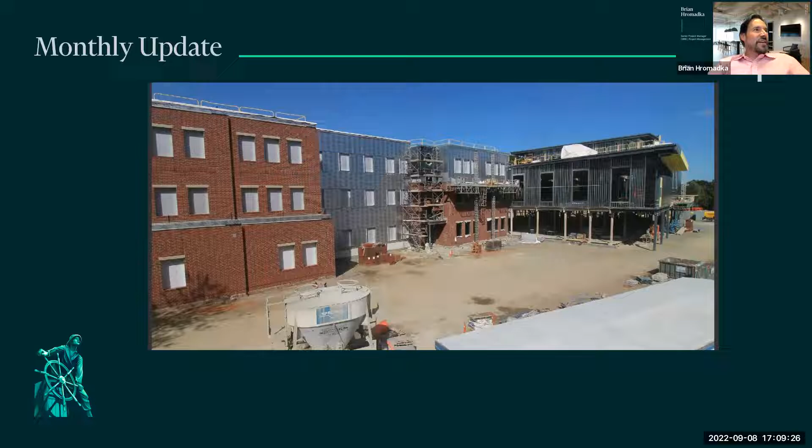We're actually getting this air and vapor barrier all the way around the building now, starting to look almost like a little bit of a spaceship with all that silver. But the project continues to track well, on schedule and on budget. We've been finishing up the building exterior as well as the interior framing and the rough-ins on the mechanical, electrical, and plumbing work. This is really a great time to see the building up close because you can gain appreciation for the amount of work that goes into the finished product. There's a high level of coordination both on the inside work and the outside work, and you can see that whole spectrum of it right now.

Building B is also making good progress, and over the next few months it's going to be catching up with Building A. We've had some material delays on a few different items, but WT Rich has been able to coordinate the work activities to accommodate some of those delays, so we're very appreciative of some of those things.

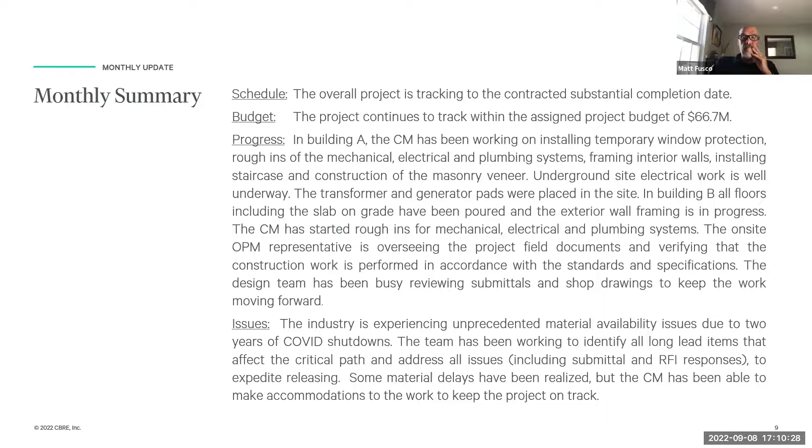As far as the team activity goes, things continue to be good. Everyone's working well together, and that's really been key to the success of this project so far. Everyone's trying to do their best and collaborate in order to provide good results.

WT Rich hosted a little luncheon for the on-site workers last week. That was also a nice thing to get together and celebrate the progress we've made so far and build relationships. So we appreciate that.

As far as our roles go, they're pretty much the same as last month. The building's coming together, we're about ready to start finishes. Like I say, we are tracking on time and on budget.

So if we switch to some of the financials here, we have now included the change orders that were approved last month. This bumped up the construction costs of the job, but the funds were able to be covered by the resources that we've set aside for the construction contingencies. And we continue to maintain a healthy amount of these contingencies for where we are to date in the progress of the work, despite a lot of the challenges that we faced with market conditions.

I think this is really on behalf of the team working well together during the planning, design, and construction phases, really all of those things combined. But we've also been fortunate that we haven't been hit by any major disruptions so far. So knock on wood, hopefully we'll be continuing that way.

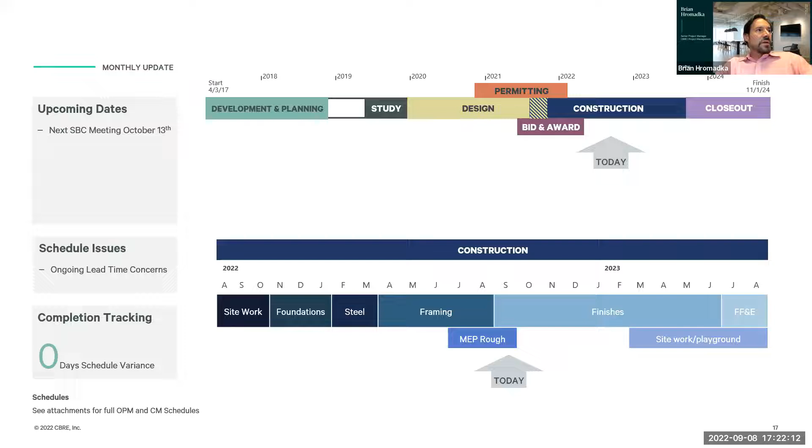Moving on to the OPM, as far as the specifics of what each of us have been doing, the OPM continues to operate much the same as before. We've been working through a lot of the project financials to determine opportunities for further enhancing the school, possibly adding back some various items, while also managing current costs.

Keeping all the accounting sheets balanced, community relations continue to remain strong as well. We haven't had any issues. We continue to send out notices — one just went out today for a delivery happening tomorrow. But now that the building's getting closed up, disruptions to the neighborhood will continue to diminish.

As far as the design team goes, their work on the project continues to move along with the FF&E — that's the furnishings, fixtures and equipment selection process. We've updated our project schedule to show that, and it's all included in your packets, with the milestones. Sample furniture is going to be showing up soon at both the vet school and East Gloucester schools.

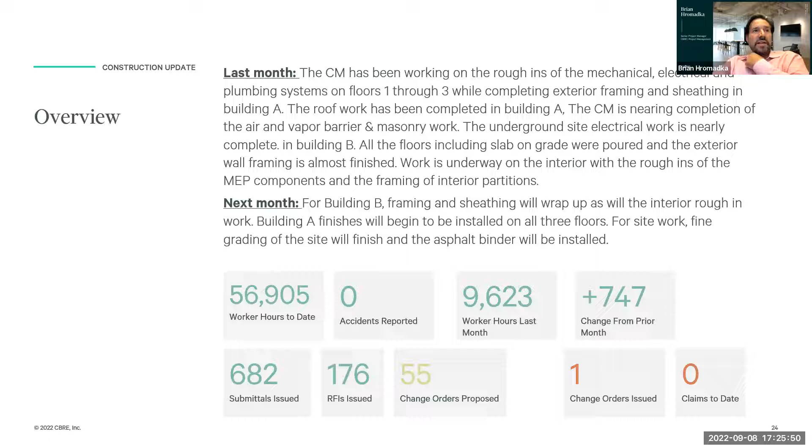As I said before, we're continuing to track on schedule. If we look at these milestones, some of them we finish ahead of time, some of them we finish maybe a little behind, but overall the work continues to track to the schedule. These variations are typical — sometimes you run into things that happen on the job, but WT Rich has done a good job of accommodating whatever delays have happened and keeping the overall project on schedule.

Here's the schedule updates with a little more specifics about where we stand on each of those items. And I can turn it over to WT Rich to walk you through.

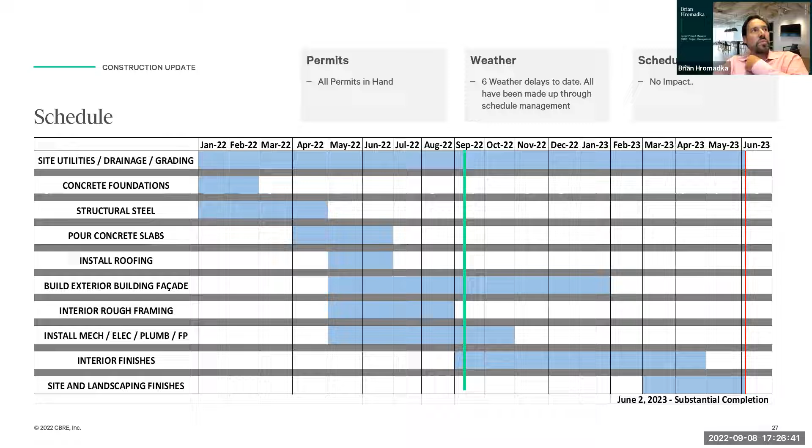This month we'll be doing the open space as we've done before, so it'll be a nice opportunity, as I mentioned, to see some of the things going on inside the building and the level of complexity you'll see on all the systems.

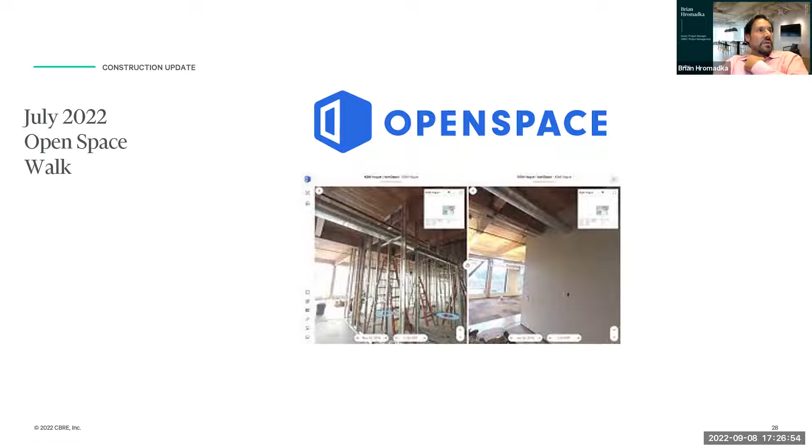So I'll stop sharing here. And Alex, can you pick up? Sure, I need access. Currently disabled at the moment.

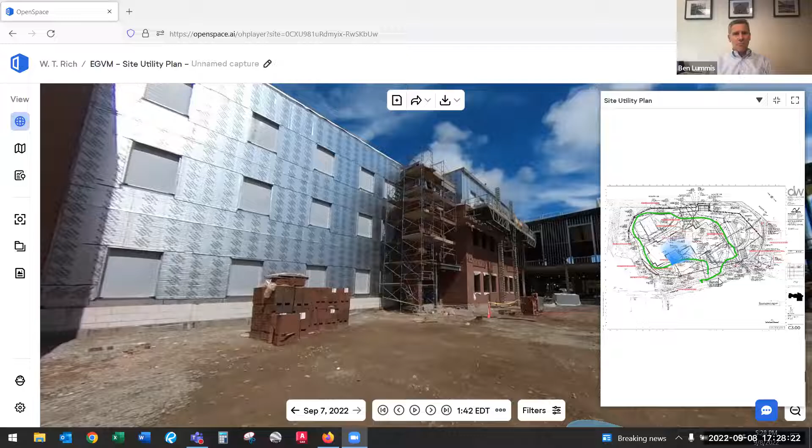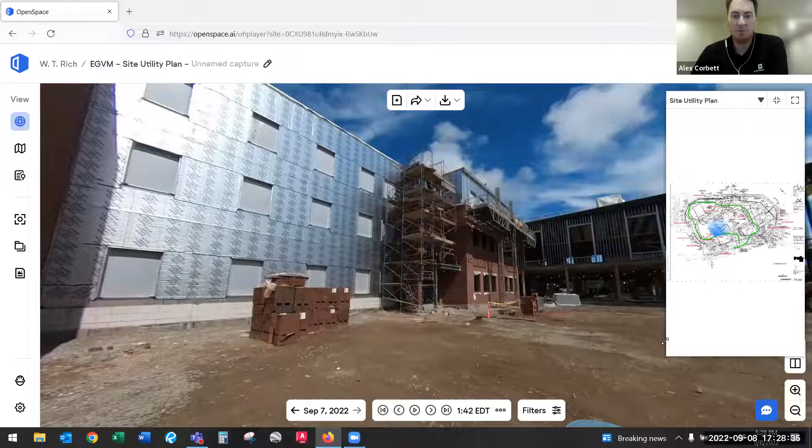Thanks, Ben. So this is the open space program Brian mentioned, which you've seen a few times throughout the project. I'm sure everyone has probably seen it from the street now, so I wanted to start there. As Brian mentioned, the AVB, the air vapor barrier, is going up on A building now - that's the silver aluminum foil material being wrapped on the building.

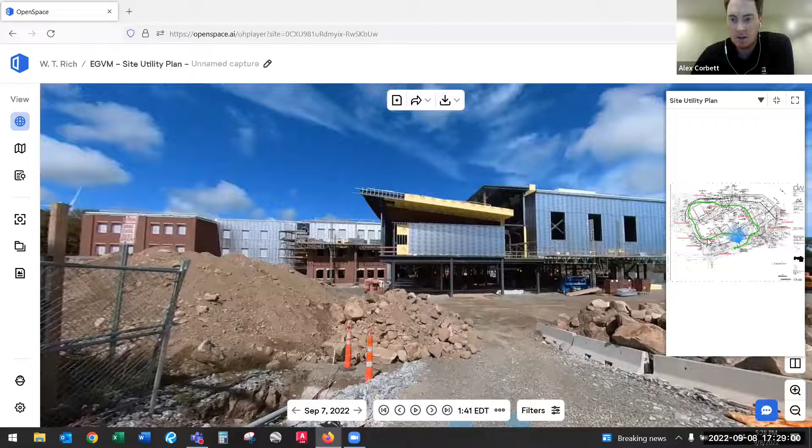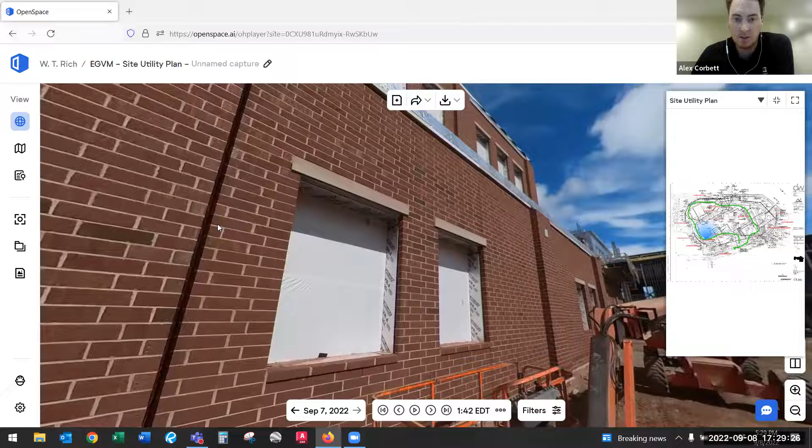We've also started cleaning the brick, which is a pretty normal process once we get the brick installed. I wanted to show you the juxtaposition of dirty brick that hasn't been cleaned yet versus, as you move closer, how nice it looks once cleaned and scraped. You can also see the temporary windows placed within these openings - fire rated tarps that allow us to begin finishes within the building.

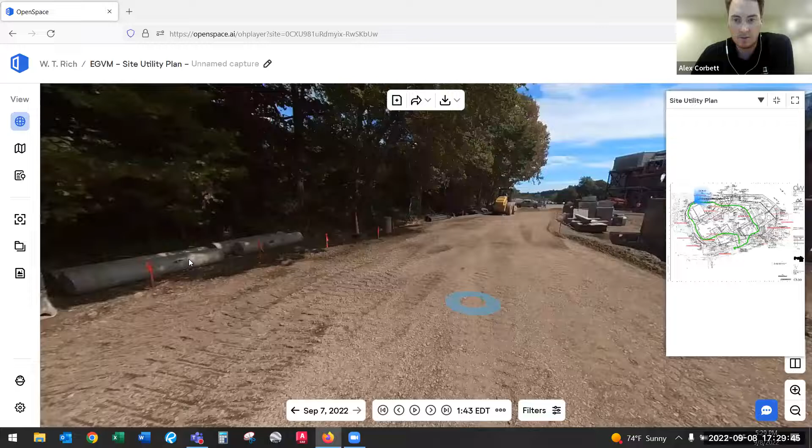I'll rotate quickly around the site and then get into the building. We're standing at the back turf area - you'll see the turf, with the playground on either side, and then the running track and bus loop mix comes into play. We're getting ready to place binder next week, which is a nice next step. It'll tidy up the site quite a bit, and you can see how clean some of these roadways are getting now that we're fine grading and getting ready for binder.

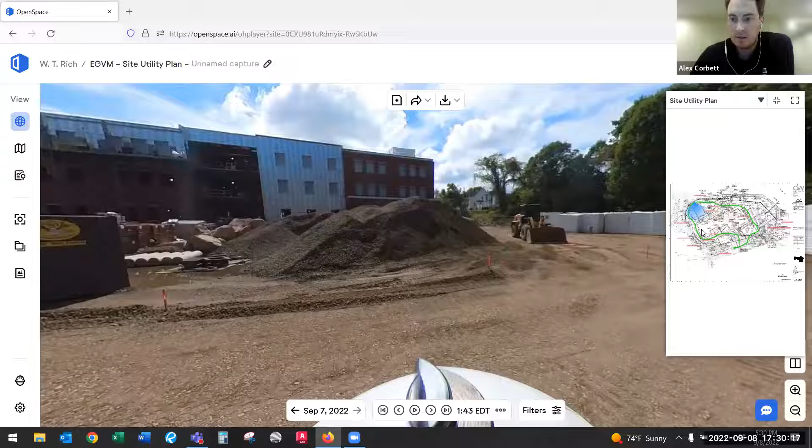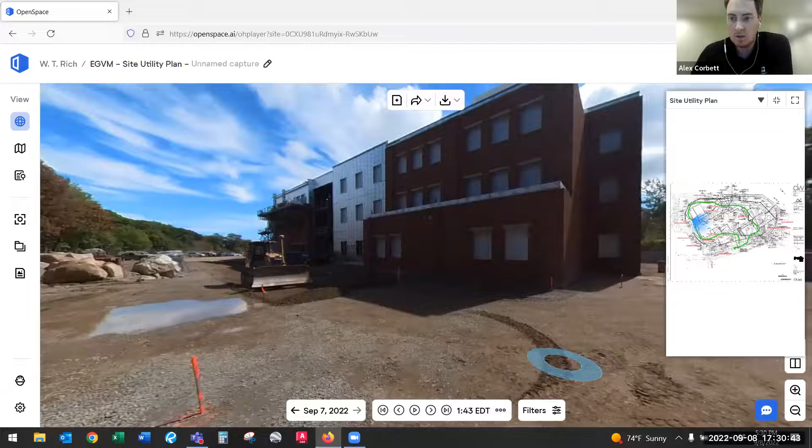Again, a back view for those who haven't seen this side. You can see the brick going up - it's been cleaned on this side, and bricks going up on this side. We've got the AVB, and this is a metal wall panel infill here, with a large curtain wall, a 3-story curtain wall. We just got the material today and will start installing it. I'll work to the east side before we get into the building, to see how the gym is taking shape with some of those large openings.

Last question - when you mentioned binder, can you explain what you mean? Binder is basically the base coat of the asphalt pavement, so two layers of asphalt. We'll do the binder course at 1.5 inches, and then come in over the top, with the last thing being the last 1.5 inches of top coat asphalt. The binder really helps keep the site clean, but it's also a necessary step to get the final asphalt in place at a later date.

Is the binder that first coat? It's like considering it a primer coat or a first coat of the asphalt. Great, thank you very much.

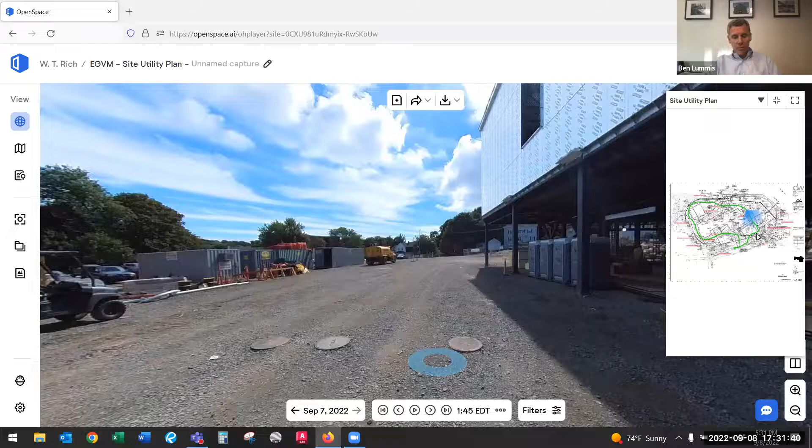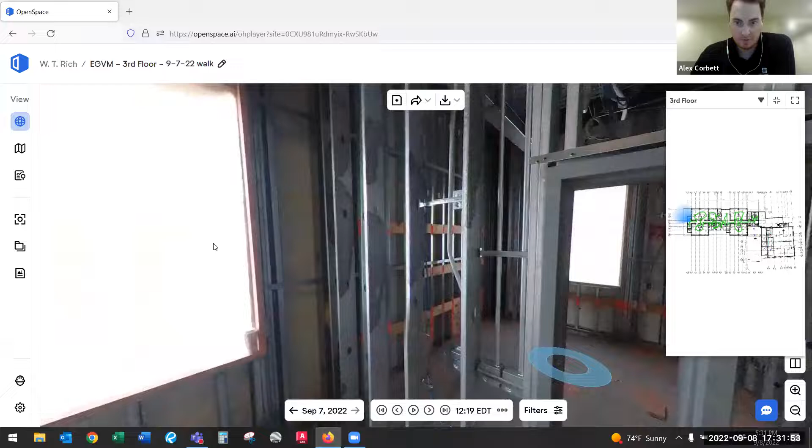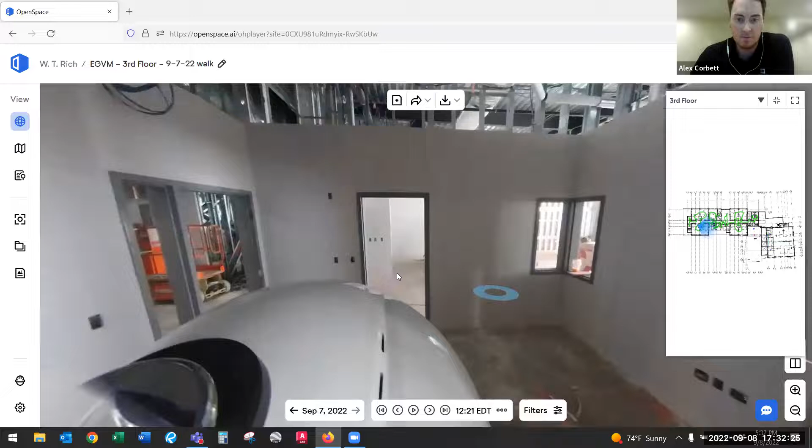So let me move inside. I'll go to the 3rd floor since that's the furthest along per our schedule, and I've brought you down these corridors before. It's obviously getting more enclosed as the project goes along. You can see the framing is 100% complete at this point. A lot of the orange spray paint you'll see is not only for in-wall blocking, but also for labeling devices on the ground. One of our milestones was starting drywall this week and into next, so we're right on track to start boarding up some of these walls. The building inspectors have been through.

We all kind of get on the same page in terms of what they want to see before we close up these walls.

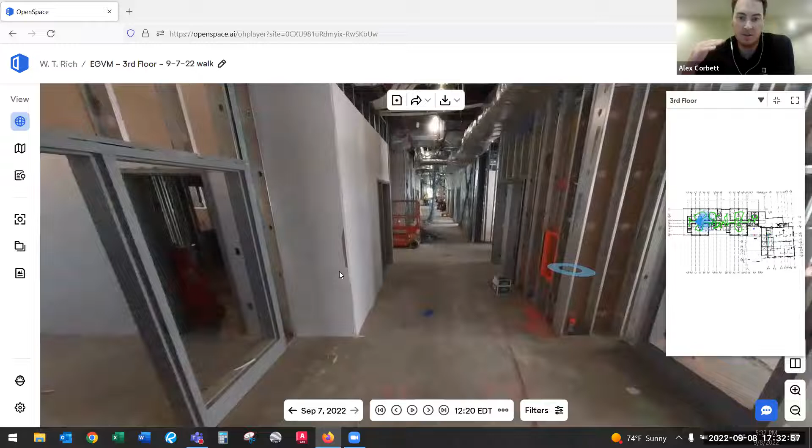We've actually had a lot of our rough MEP inspections, which is basically confirming that wires are in place, ducts installed correctly, piping's been terminated properly and whatnot. So a lot of that's already been conducted on the 3rd floor. We've tested our fire protection lines as well.

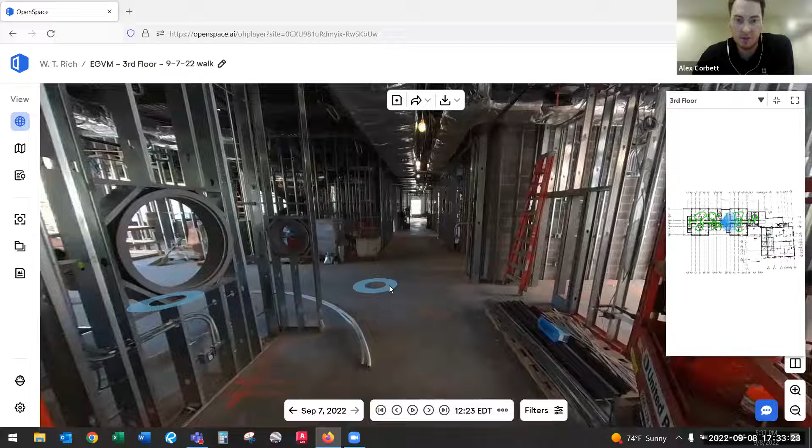We'll continue to move down 2nd floor to 1st floor as the project progresses. Hopefully by the 19th, when you guys are on site, it'll give you a nice insight into what some of these rooms look like—somewhat finished with the drywall on, but also some unfinished with the framing on the lower levels. So again, just walking you through here, you can see the porthole windows that Doran Whittier incorporated into the design.

This is a large extended learning space with that curtain wall that I mentioned earlier. A really nice big space for extended learning. We've got stairwells.

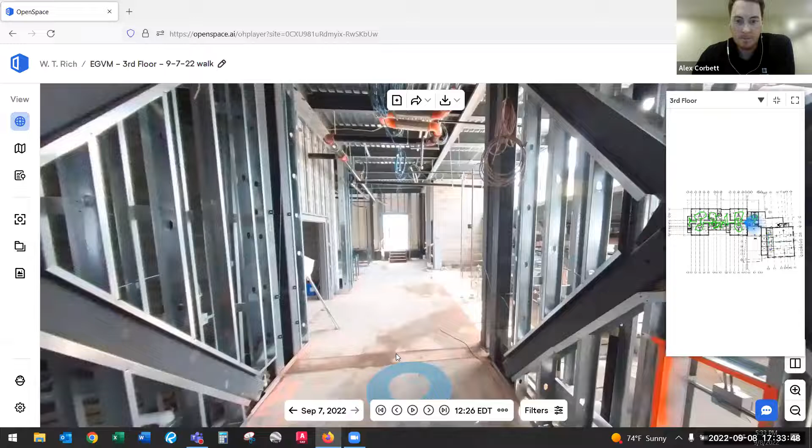I'll work my way down towards B building. End of corridor. And this is where the elevator will be. I won't bring you to 2nd and 1st because I think you guys have seen it for the most part, but again, you can see the development of how this 3rd floor is going, and how it's going to progress over the next few weeks into really getting the finishes going.

So I'll move to B building just to show you where we're at with some of these larger open spaces.

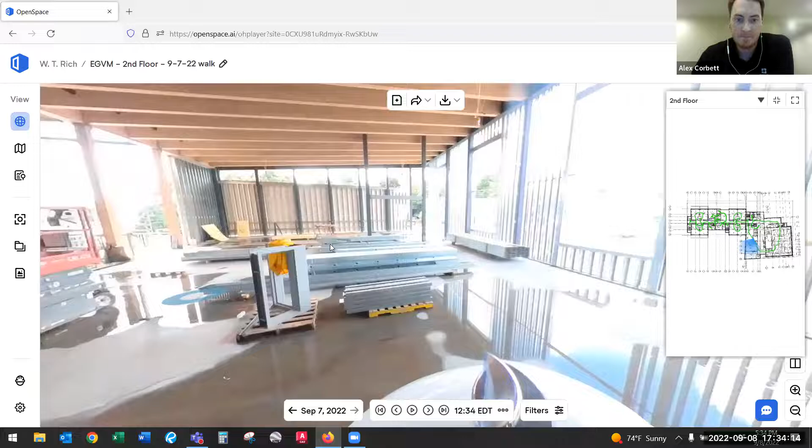This was after a pretty decent rainstorm over the weekend and into Monday, so we don't have a roof over the media center yet. This is the media center area, but we're pushing for that roof because it allows us to continue with some of the more moisture-sensitive activities below. Again, gigantic windows into the media center. You can see the glulam that I think I showed you guys a month or so ago as well.

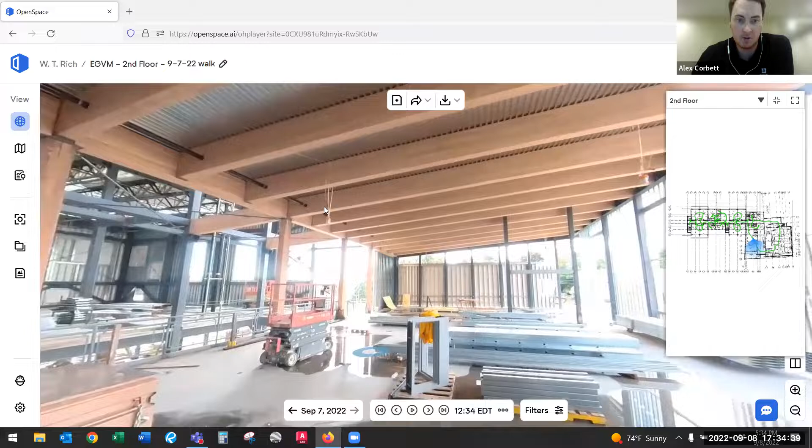Crossing over that 2nd, mezzanine level of the main lobby, you can see just how gigantic the space is with the glulams and the steel. That'll be painted and exposed in various capacities.

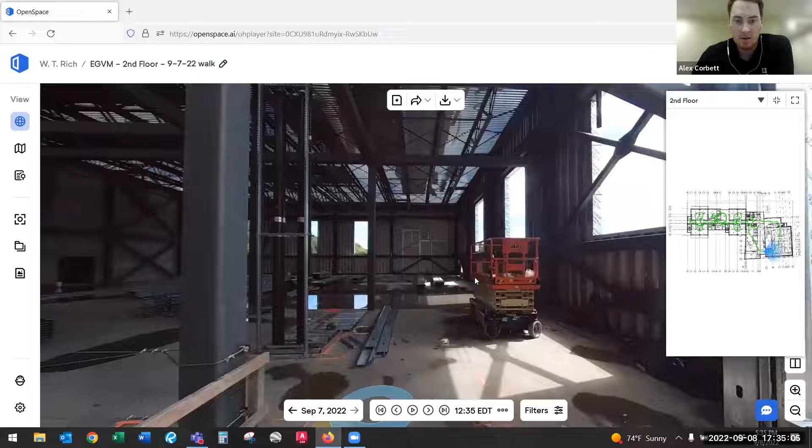And then you get into the gym with the large windows as well. It's kind of our lay down area right now for the larger studs. Over the course of the next few weeks, we'll start getting these studs up in place, following a similar sequence to A building—getting the studs up, and then getting the rough MEP stuff to follow into finishes. So we're looking at the stage right now, or the platform, that'll be constructed and framed out over the next few weeks.

That's kind of the general building tour. Obviously, you guys will see a lot more in the next week or so when you're on site, but I'd be happy to answer any questions if there were any.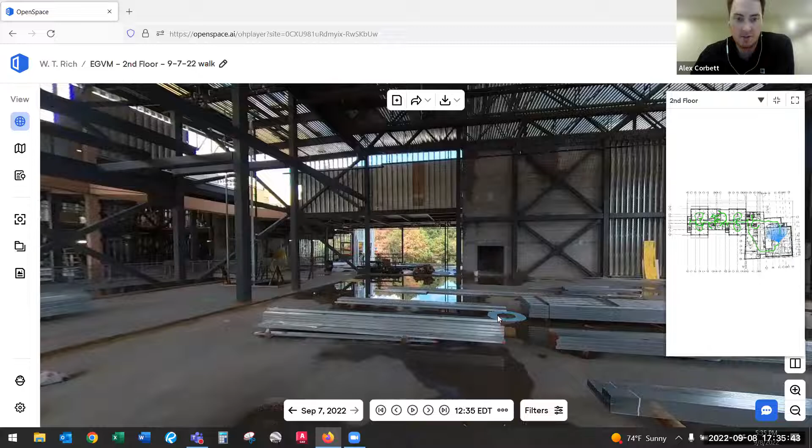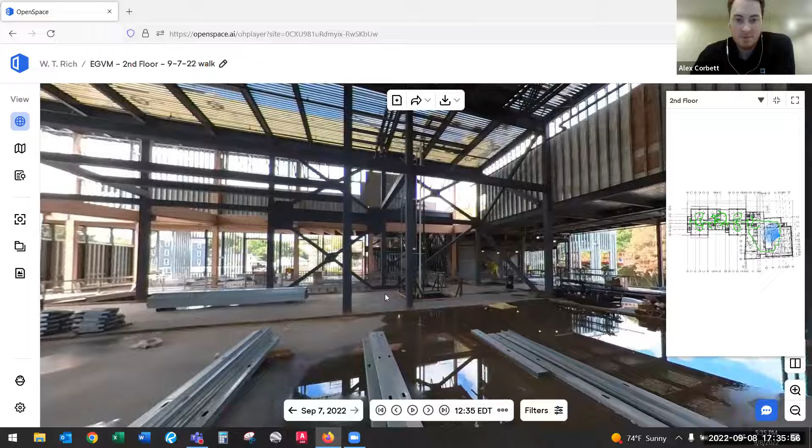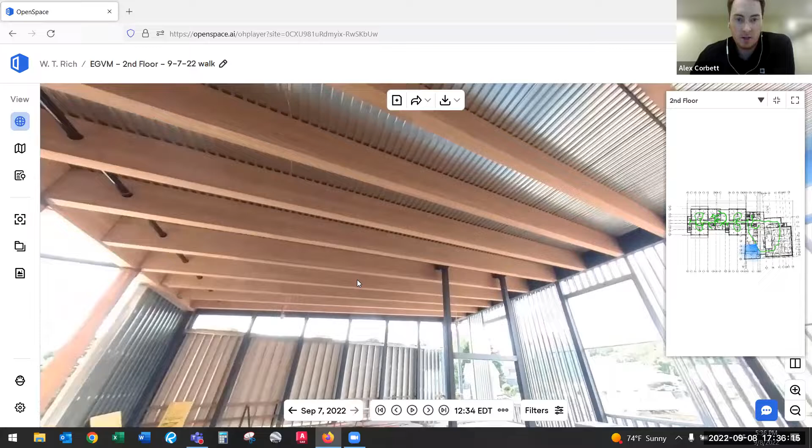I'll just make a comment that the brick looks absolutely beautiful. Yeah, it really is nice. So, Alex, John Pope here—the glulams, are they going to be stained, or are they just going to be natural as they are? John, they have 2 layers of clear sealer on them now. And I believe, Brad, correct me if I'm wrong, the intent is to leave them sealed and not stained. Correct.

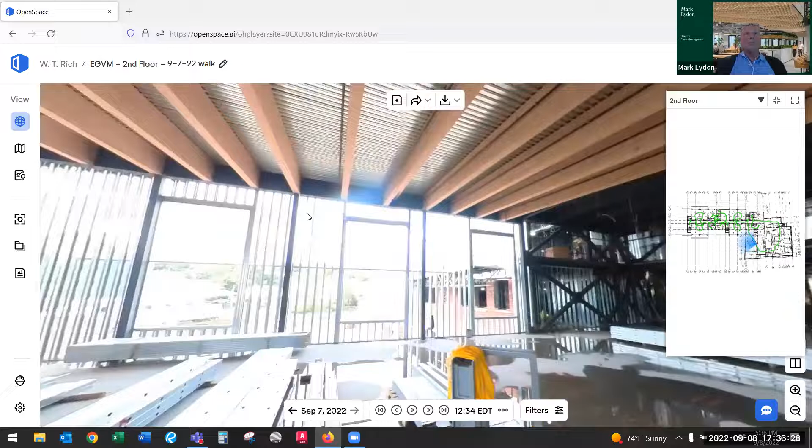Any other questions, Alex? Yeah, I had a question on that picture you were just showing where the glulam was—is it staying that corrugated in between? No, that'll get an infill of acoustical ceiling panels. Okay, yep.

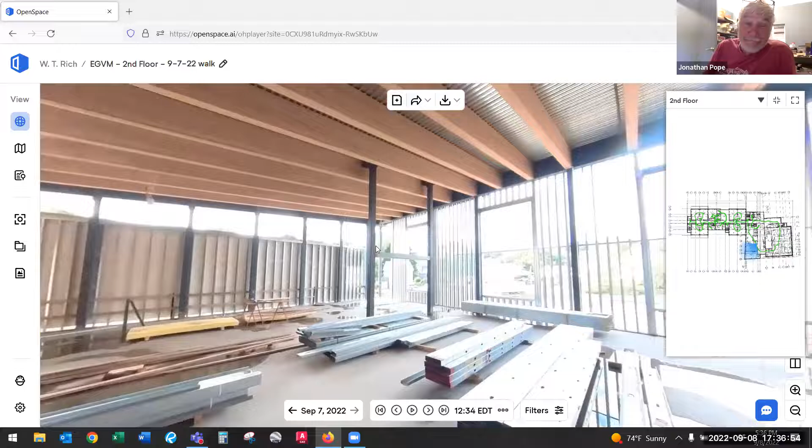Looks great. Yeah, amazing. It's really a nice design. So I'll stop sharing and kick it back to you, Brian.

Yep, that's pretty much all I have for everyone, unless there's anything that anyone else would like to bring up.

Amy: I just want to say, Matt and I were able to let some teachers go in the building on the first day of school, and they were thrilled. They were giddy, standing in their little spots, taking pictures of themselves and what their office or their classroom will be. So the excitement is building. So thank you for that. Cool.

All right, okay. Sorry, John, there's just a couple things I want to mention.